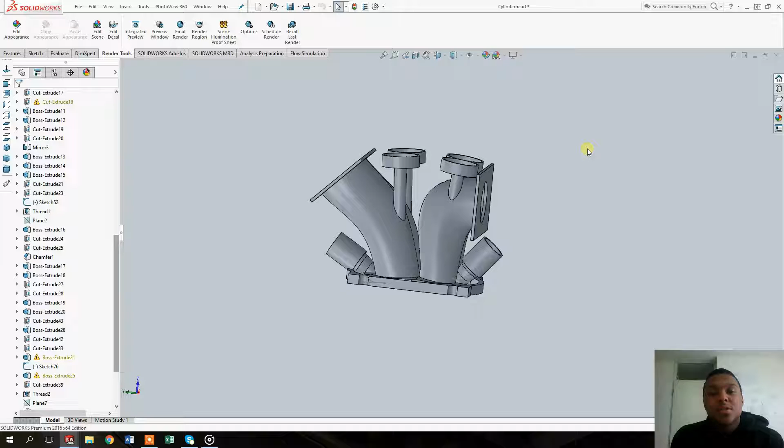In this episode, I wanted to make the ports for the spark plugs to go through. As you can see on your screen, I already did that, because this is basically it. But something went wrong with recording and some files got lost, so I just wanted to show you how I did it.

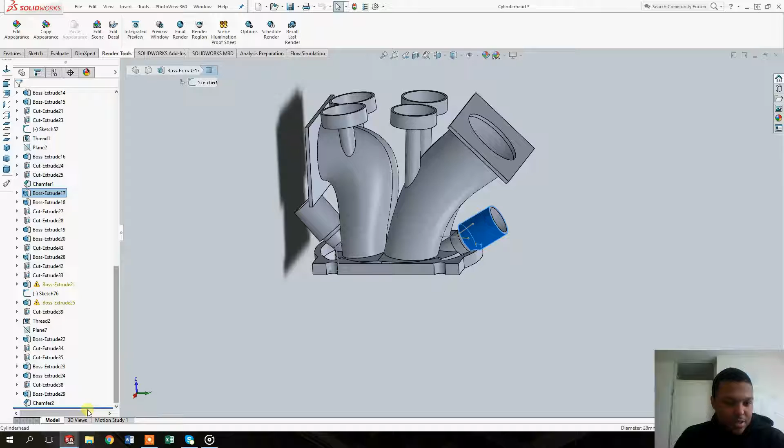To start off, I can drag this blue bar to roll back all the parts that we're not using right now, but not that far. From about here, you can start to see how I did it. First off, you need to make a rectangular shape with a plane facing the direction where you want to sketch on.

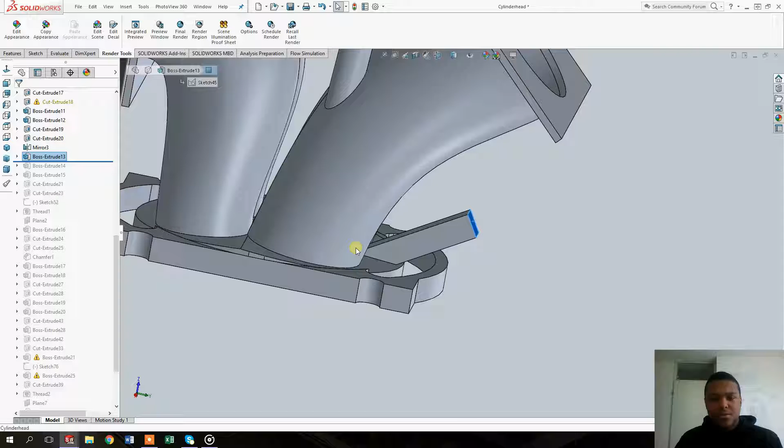So to do that, you need to make a sketch first. In my sketch, I made this rectangular shape at a 150-degree angle from this surface right here. Afterward, once you make this sketch, you can go through the boss extrude.

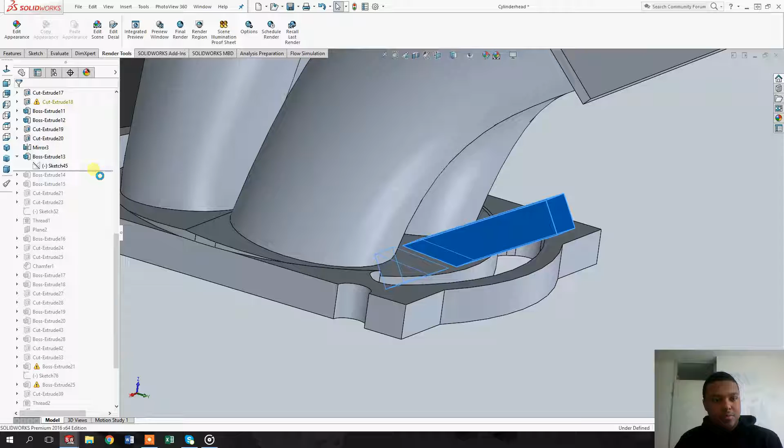As you can see, instead of doing it up to the sketch plane, I did it up to vertex. The vertex I selected was this midpoint right here, and I did it 5mm in both directions just to create a plane big enough to sketch on.

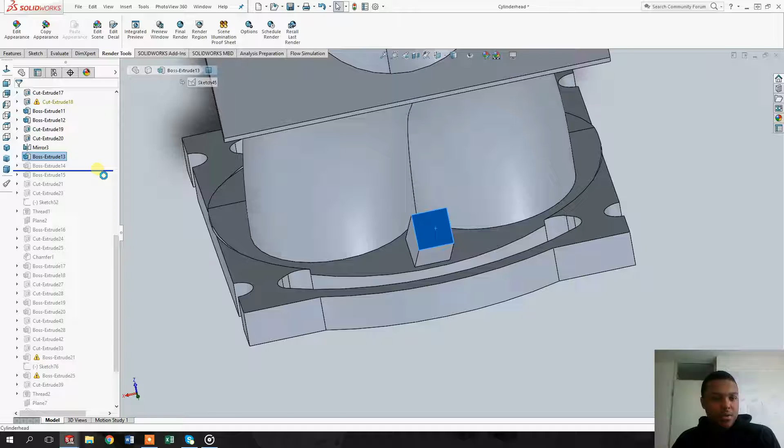Once you have this plane, you can now start making a channel for the spark plug to go through it. In my case, that's a channel with, I believe, a 14mm diameter.

I could be wrong. Yes, a 14mm diameter with a 16mm diameter around that one, or 18mm diameter.

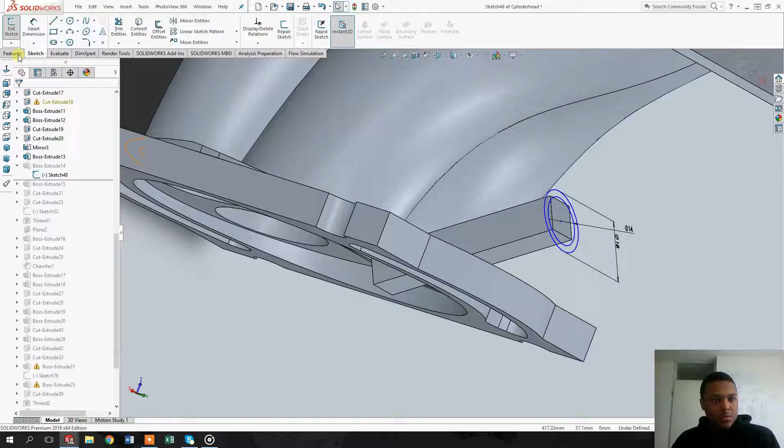Once you did that, just drag that thing out to about this top surface as I did. But at the same time, as you're making the sketch for this circle for the channel to go through, also make sure that you use the convert entities tool on these circles right here, just to make sure that this hole doesn't interfere with the valves or anything.

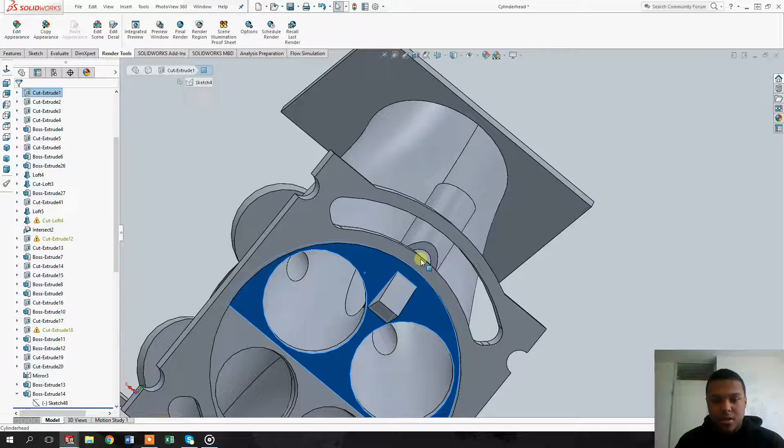Because if the hole does interfere with the valves and the valves can't completely close the chamber, there could still be some air going in or out the ports when you don't want it to. So that's one thing you have to be very sure about.

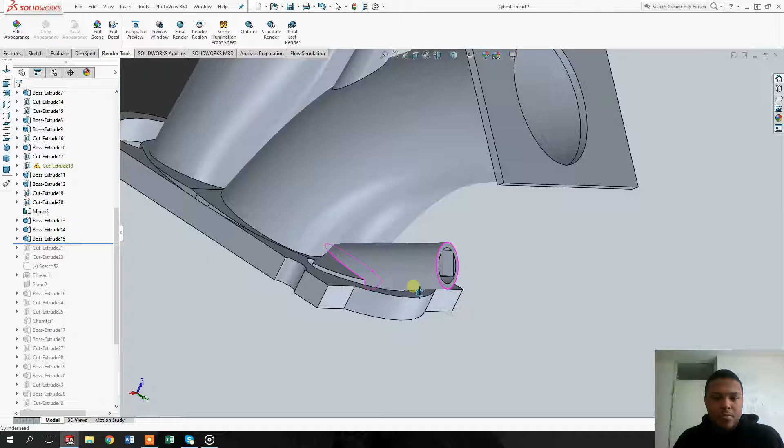From that point, the next step I took was closing this part right here. As you can see, if I drag this up one, you can see that it's still open, and we want it to be completely closed. So that's what I did.

So what you can do is select this surface, click on sketch, then select this surface, click on convert entities, and then drag the whole thing down to this surface. Once you do that, you end up with something that looks a bit like this. Now it's completely closed.

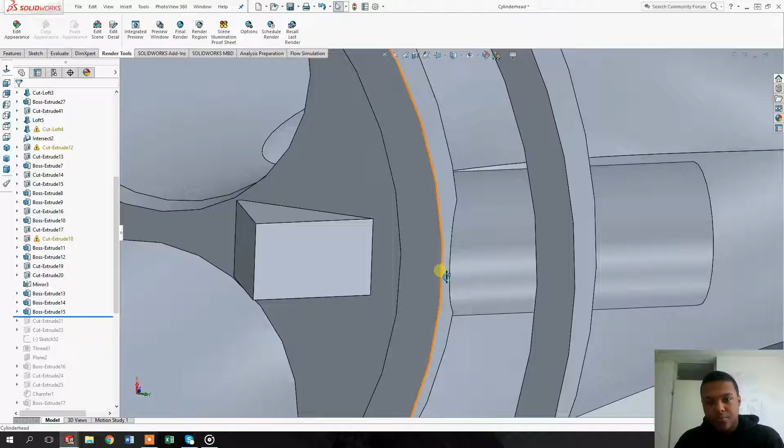As you can see with the cut extrude, I took out the square that was in the center of the circle. First I took out the square, and afterward, once the circle was left, you can also take out the circle.

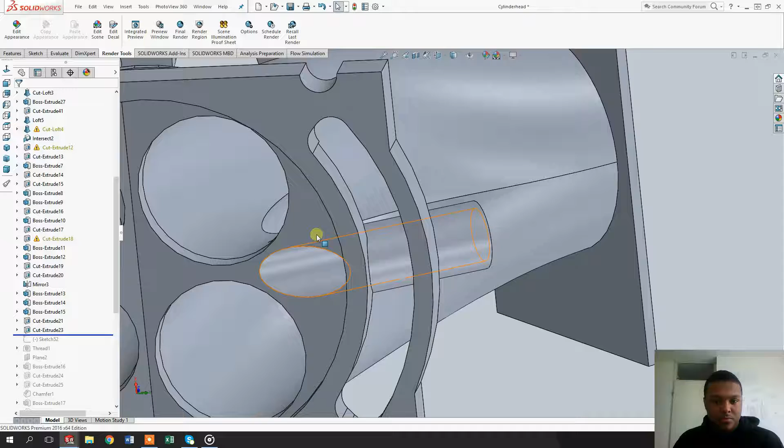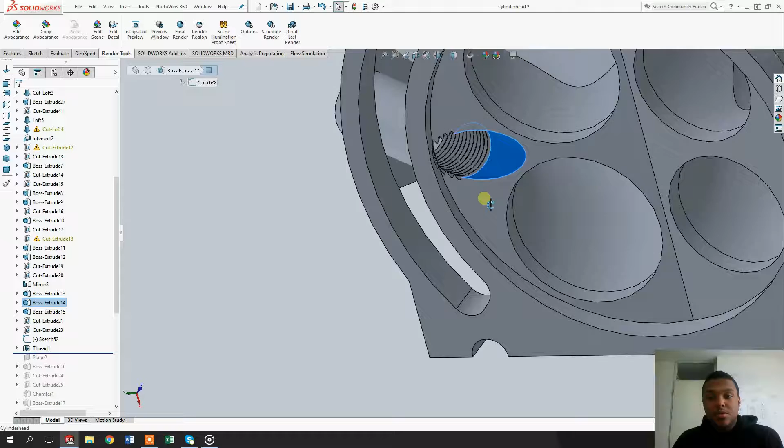Then you have to make a hole for the spark plug to go through. Once you make that hole, you can start making the thread. I made this sketch right here to make sure that the thread doesn't continue longer into the cylinder than it needs to be. So it's just up to the midpoint of this line right here.

The spark plug has multiple layers to it, so that's basically what you see right here to make sure that it doesn't go in deeper than it can go.

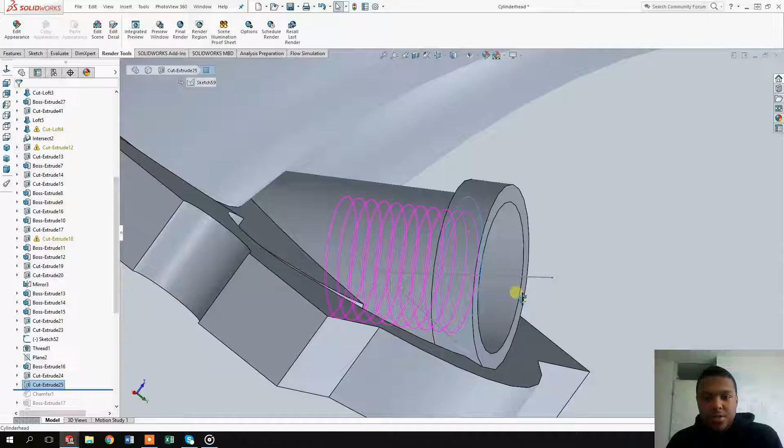And then I basically made this chamfer to make it a little bit stronger. After you did that, I made this cylinder to go around it. On this face, the hexagon shape will fit for the spark plug.

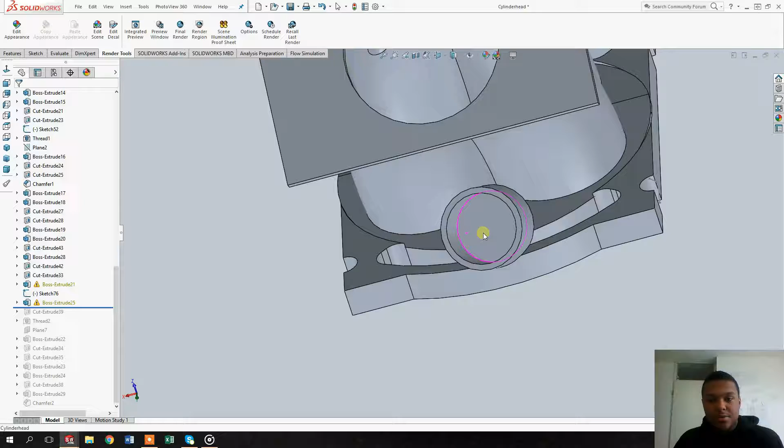So the next step is to make sure that it's one piece and then make a cut extrude that will dig it out even further, and now you have one complete chamber for the spark plug to go through.

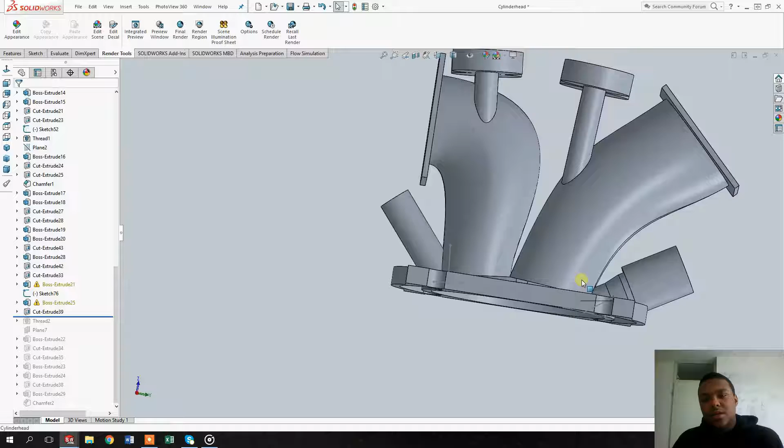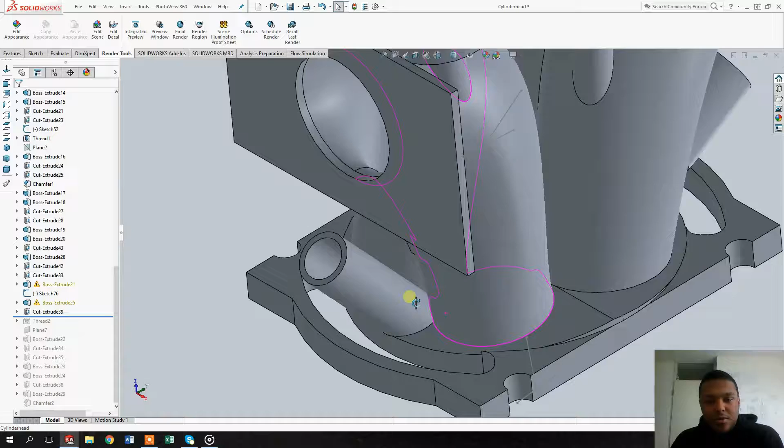As you can see, I already also started on the other side. One thing you might notice is they're at different angles, and the reason why is because the air intake ports are bigger than the exhaust ports. I have more room to store the spark plug at a higher angle, to keep it a bit of a low profile. But because these ports are smaller in diameter and have less space, the surface we can work on is also smaller.

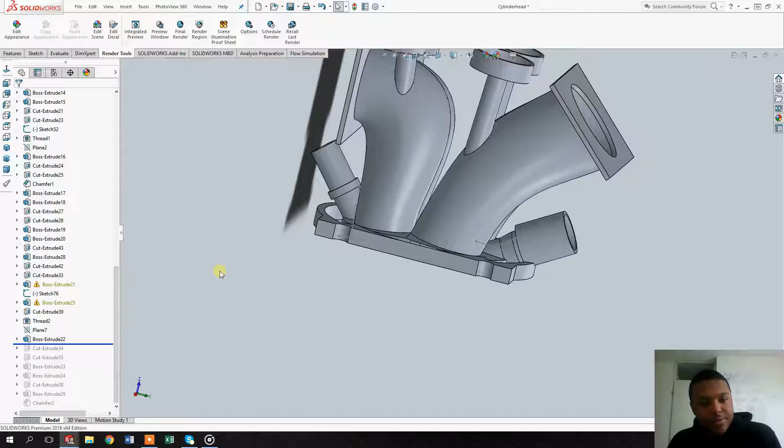So in order to get the same size spark plug in there, you have to fit it at another angle. You can also see that these two circles have different sizes, so that's basically why there are different angles. Ideally we would have them at the same angle, but that's just not going to happen. I'm basically right now doing the same thing on the other side, making sure that everything will fit.

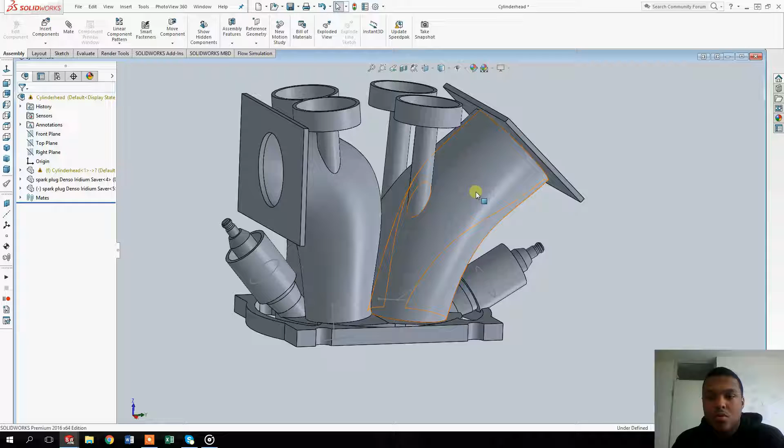As you can see right now, if I go back to the assembly for the cylinder head, the spark plugs fit right in. If I change the transparency of this part, you can see that the spark plugs are right in the spot where they need to be.

I think I still have to move the exhaust port up a little bit to make sure that we have enough clearance on this right here. We'll check that out later.

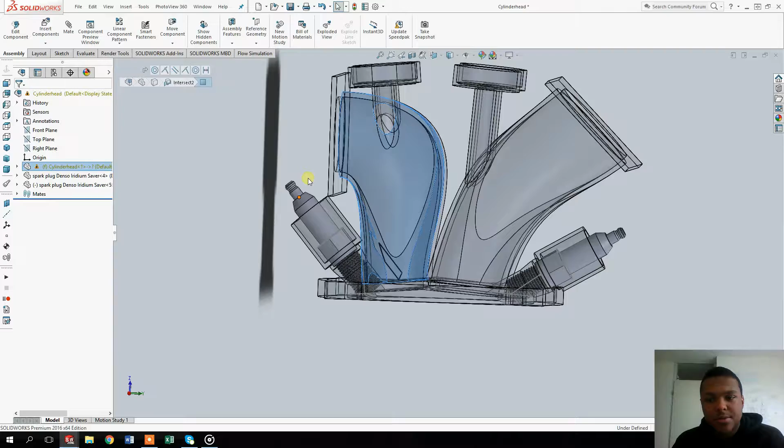But yeah, that's basically it for this episode. I hope you guys enjoyed it and kind of learned something about how to do that. I think I will do another video that goes a little bit more in depth about how to do this properly. But for now, this is about it.

In the next episode, I wanted to make the actuators for the cylinder head and also try to make the fuel injectors. So that's what the next couple of episodes are going to look like.